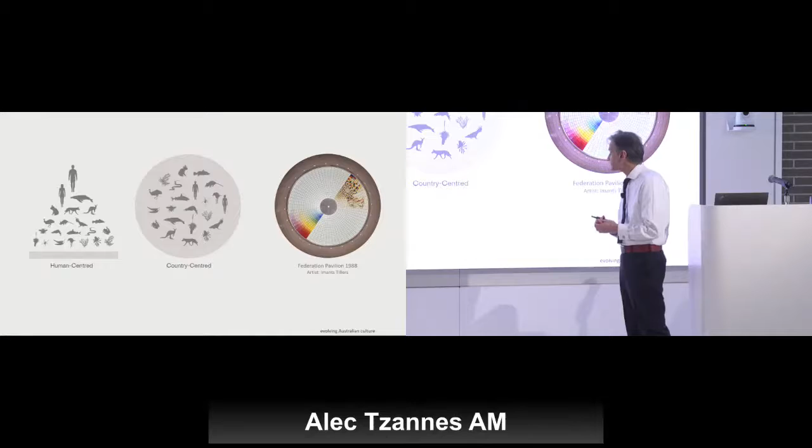This idea of caring for country is now first and foremost in the minds of design thinkers, design selection processes, and design itself, meaning that when we're bidding for work, for government and corporate work, not so much small work, we have to address this change of thinking. And I see this as a very strong thing.

On the far right is a project that Bob Stern published many years ago, which I'm not going to talk about in detail, but it was prescient in some ways, because in 1985, I was selected to design a monument to the Federation of Australia, a country formed in 1901 by a British Act of Parliament. The monument is about the evolution of Australia and also about time, past, present, and future. Inside this dome of 1,800 enamel tiles, I was responsible for the selection of an artist, the development of a brief, and the implementation of the art, the design of the actual construction of the art. But the artist Imants Tillers came up with this incredibly interesting, prescient notion.

Because the interior space is about the present, it's moving, it's rotating, it has a sloping floor, sloping walls, and the way the sun moves around the circular building accentuates the idea of rotation. Imants created these two propellers, and on one side, on the right, you can see symbols from pre-colonial history, from Aboriginal communities, symbols of place and the caring for place, reflecting their values of caring for country.

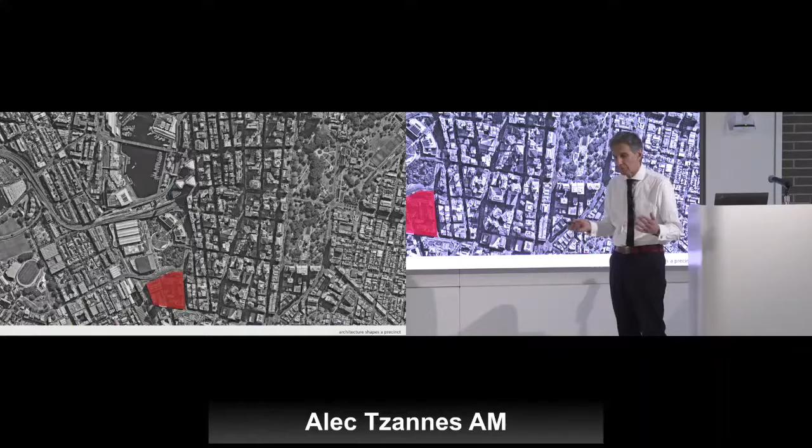It's located in an important part of Sydney, south of the CBD and the edge of the harbour. It is a whole new precinct that came from the disused building infrastructure of not much historic value, and created a whole new residential mixed-use precinct.

Now, in thinking about this project, which was about 600 apartments and a range of scales and also some other uses, mostly retail uses, the things that impressed me in the precinct were the brick buildings. These were the adapted warehouses from the 19th century that were now commercial or residential buildings, or even becoming educational buildings. And what also is in the area and is a very important building is this business school by Frank Gehry in one of the universities.

And I don't take anything away from Gehry's contribution. He's given us so much, including form making, which I'm also a beneficiary of. But the important reason for not using this is the technology, because behind it is a stainless steel 316 steel frame that supports the brickwork, which has, let's say, an 80-year life for a material which has 200+ year life. And that, to me, is unsustainable technology. But these buildings go on forever and will go on forever.

The other important reason was these are homes for low to middle income people. And in Sydney, there's a fine tradition of brick apartment buildings. They're low maintenance, they have a sense of permanence, they have a sense of value, enduring value. Associating the material with the history and also the culture of apartment buildings in brick, I thought gave these buildings a certain dignity, a certain appeal.

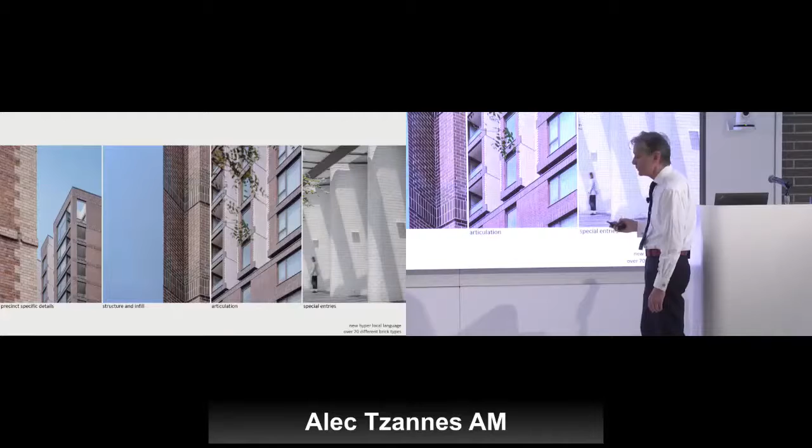So in that sort of sense of hyper-local, the history gave us ideas - and when I say us, it was 3 directors involved, Ben Green, Chi Melhem and myself - ideas on how we can create and reinterpret the language of the past into the contemporary era, contemporary design. Using new glazes, new finishes, and new brick shapes, which Brickworks really developed with us and were very effective in that process, creating articulation and special moments in the buildings with glazes.

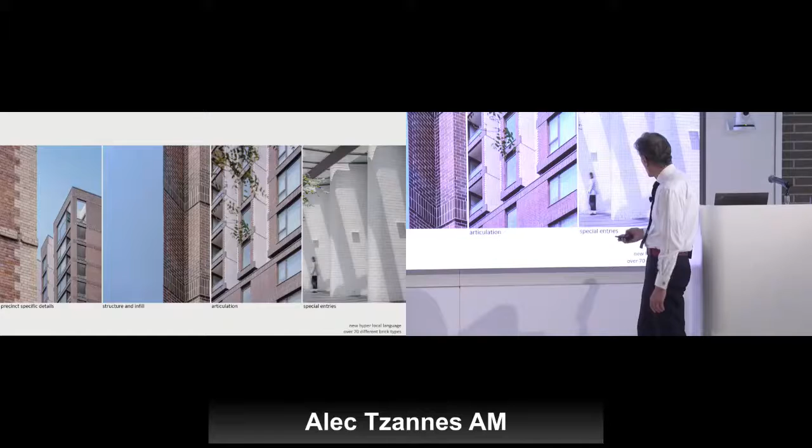All of this, more than 70 types of bricks, came in at the same price point of panelised buildings that were the new buildings in the immediate precinct, the immediate context. And yet those panelised buildings, metal, sometimes ceramics, like the Gehry building, have a use-by date. I've had to maintain them. 30, 40, 50 years, usually about 30, they need to be replaced, whereas this detailing does not need to be replaced.

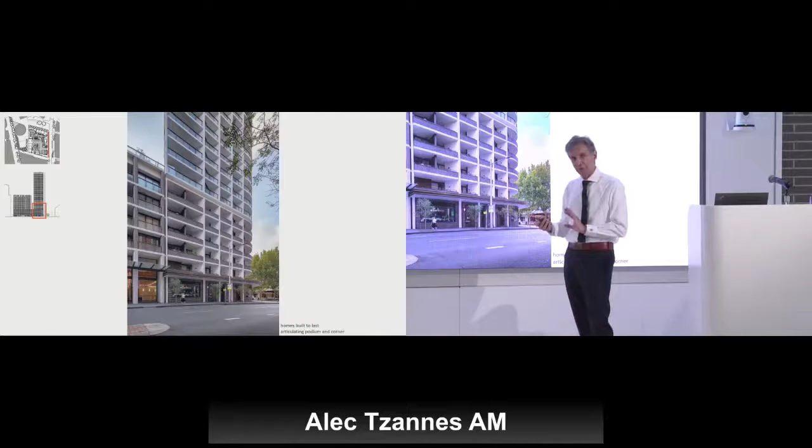So what you see here is that idea of connecting time and place, old and new, breaking the sky, creating this sense of identity across a large project through differentiated buildings. Reinforcing the urban morphology, allowing the building to shape the corners so that you can identify the geometry of the street, the purpose of the streets and blocks, and associate it with the way the building responds to it. So it's in conversation with the context.

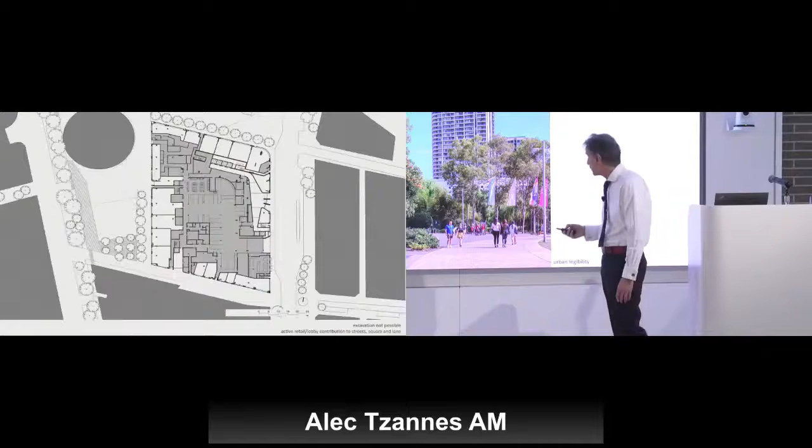And creating landmark or legibility where we have vistas so that you can locate the precinct from, for example, a park to the north. Importantly, this site is below ground silt, and too expensive to build down. So one important design characteristic was...

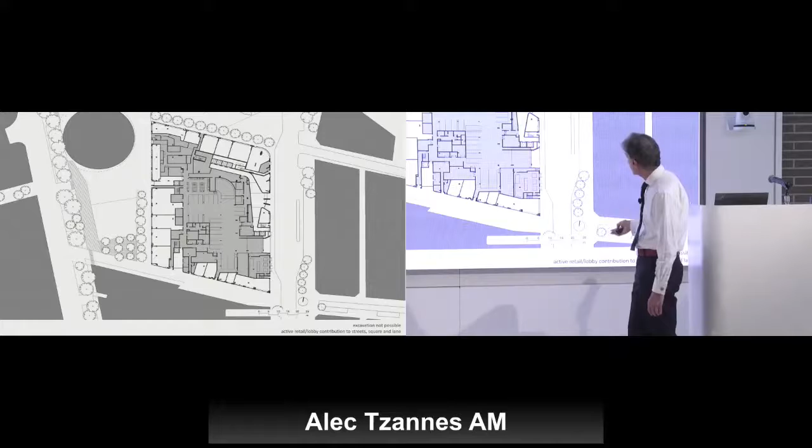...to sleeve the building at the ground level to create entries and retail, to create vitality around the public domain, which is evidenced by this small structure, which is the entry lobby, and the way in which one development is broken up into different languages, a family of languages, four distinct architectures, if you like, making up one complex.

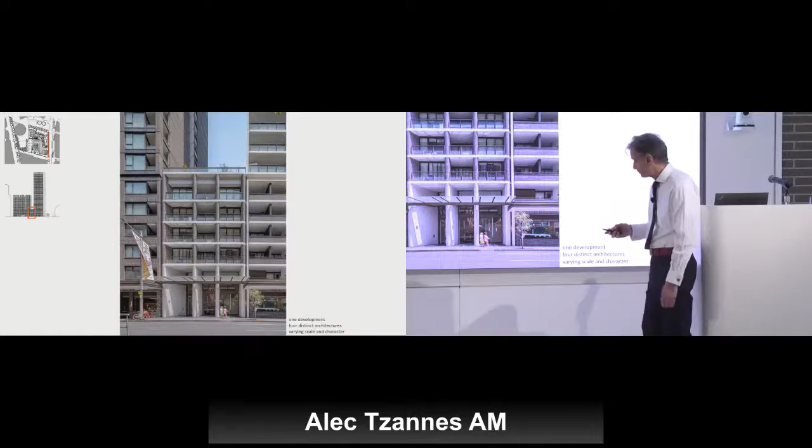And we also followed that for the above-ground car park, where we sleeved it in the podium with apartments, but also where we had a new lane, we disguised the car park with this special brickwork to ventilate the structure, which is shown in these deep reveals, and of course creates a vibrant lane from a blighted precinct. And always looking for opportunities to celebrate the junction of the building with the sky and with the ground. And here you see the sleeved car park.

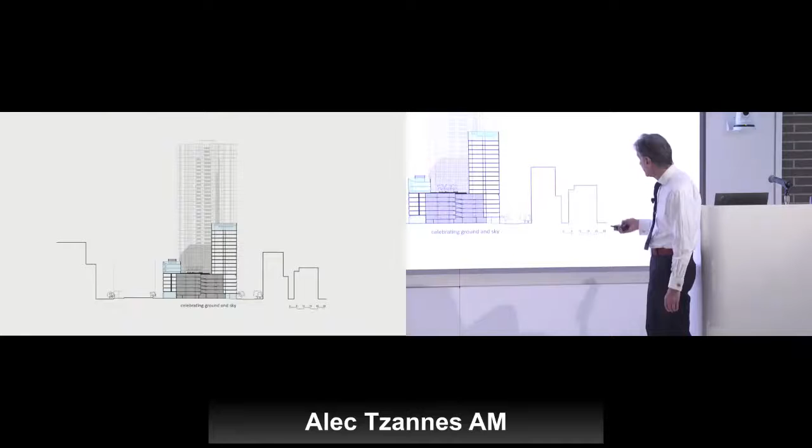And at the podium, which is forming the bulk of the building line all the way around the site, we created a landscape which is reflective of the urban conditions, so that we have this large vista to the open space to the south and to the north. And also we look onto the most important historic building.

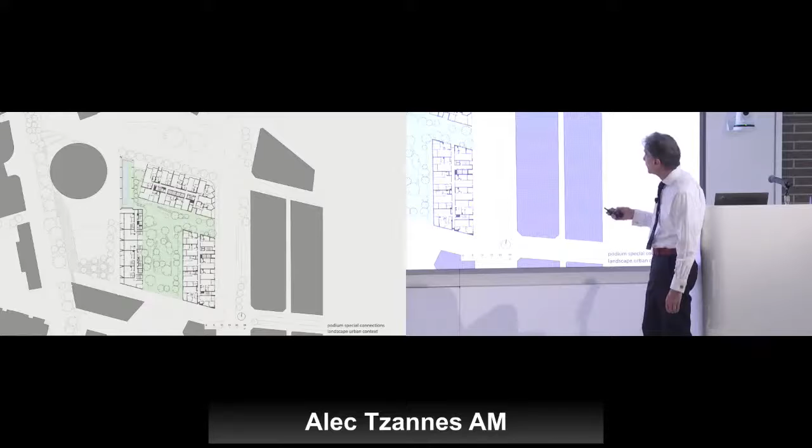You'll also see here a community centre which comes up in the slides, just to the right, where these buildings frame this courtyard. And these are the sky homes that allow differentiated language, create vitality, and work well with the brick language. Here we see the entries always articulated in a glazed brick.

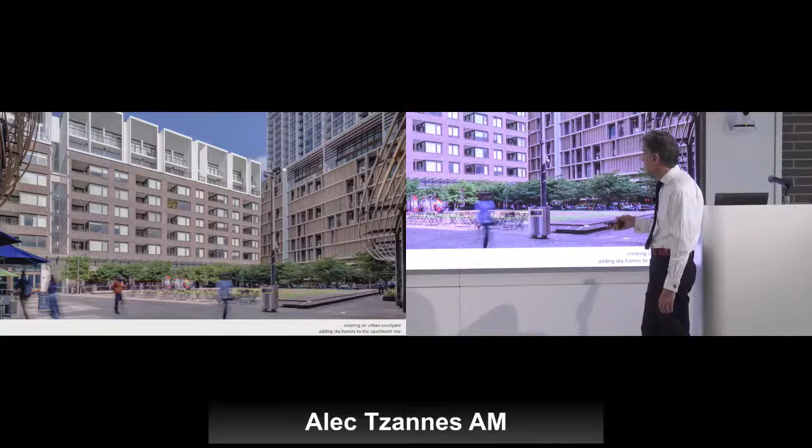And the community centre is the right move from an urban point of view, framing the open space. But I have to say it's greenwash. It's a misuse of timber that won't survive with time, wrapping a completely conventional concrete building. So this is applique, it's not effective from an environmental point of view.

So if that's brickwork, I'd like to move to a very important material, timber, which is probably the only naturally regenerative material on the planet that I can think of.

Two projects, they're, if you like, cousins, and International House Sydney was the first of these. It was innovative, it delivered a lower carbon building by a substantial margin, and was transformative in the design and construction industry by the way it used BIM, Building Information Modelling, and prefabrication. So it's essentially almost industrial design.

We say from the file to the factory, and on site there's virtually no attendance, it's all assembled. And it's also able to be disassembled. This is a critical thing for the circular economy. I think this site is underutilised, that within 20 or 30 years it could be rebuilt, and you can literally disassemble and reuse all this building, even put it on top of another bigger building.

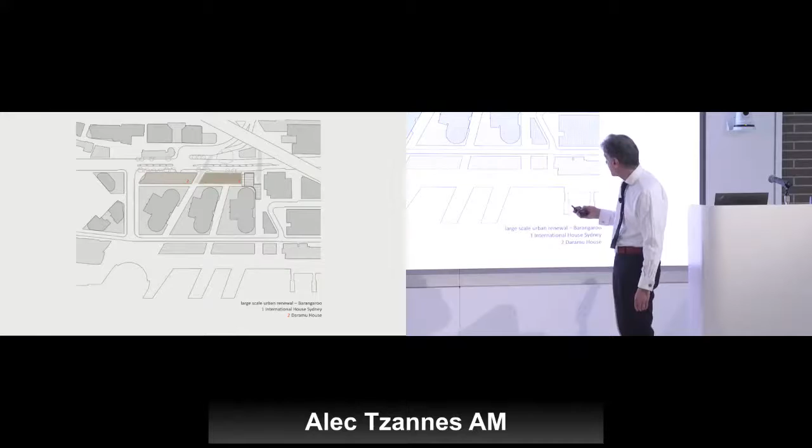In the area are these magnificent trees, decades old, 40, 50, 60 years old. And there's this building which is made from a tree. The spruce pine from Austrian forests is on display. The whole construction is on display, like a kind of warehouse, and it's protected by low iron glass, so it is reasonably clear glass.

Here there is no sunscreen devices because there's no heat load. But we also show the circular economy because ironbark, which is an indestructible timber, I back it in fire against concrete, against steel, against other materials. It is very strong material.

It was recycled from engineering structures and also turpentines from wharf structures. In fact, these are the wharfs from which the turpentines came, and the ironbark came from a bridge north of Sydney. That's an important part of the story, if we're talking about the circular economy, is to use elements from previous buildings, such as evidenced here.

The other thing that's interesting is that Australia didn't do this, but they could have. Austria invested in their forests. They made sure that the stewardship of the forest was such that the soil was maintained, effectively cared for to maintain it in time. And even the trees are felled to allow animals to not lose their habitat. The way of felling them allows the animals to move from one tree to another.

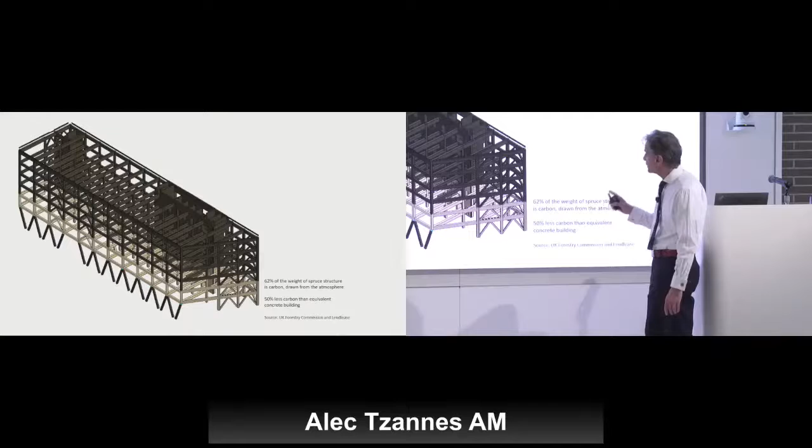But to give you an idea, 6 hectares, which is about 15 acres of a pine forest, can grow the material of this building in 2.5 hours and sequester carbon on the way through. This is the diagram that represents that. So 62% of this structure is carbon taken from the atmosphere.

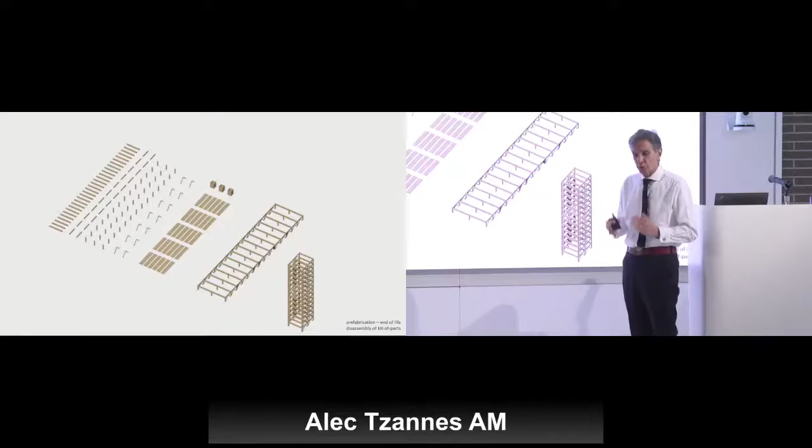And the important point was this kit of parts, that we could actually make this effectively like Lego in Austria, put it on a ship, and then in the order it would be assembled from a truck, crane it and bolt it together very quickly. And the carbon miles from Austria by ship were lower than carbon miles from nascent industries in Australia because of the distances in the trucks, plus the industry wasn't capable of delivering this size building at this time. It's getting there.

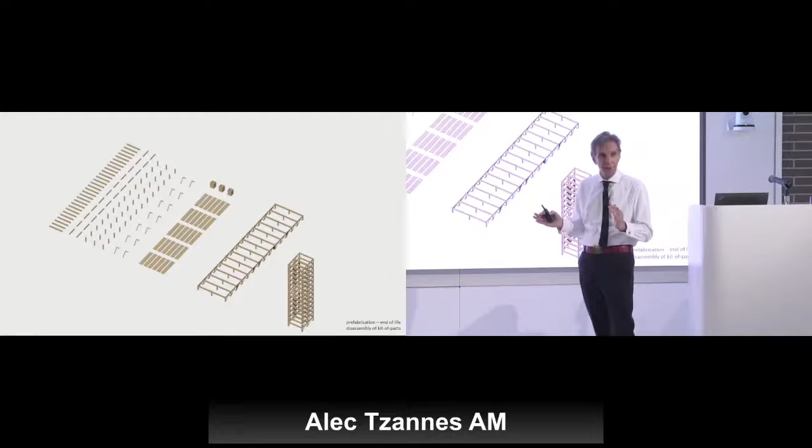And so the timber is the interior. We use LVL to strengthen glulam beams. We have CLT, cross-laminated timber. We have obviously the recycled timbers. And it's more than just timber. We use the harbour for heat exchange to service these chilled beams, and we expose all the surfaces to create the ceiling of timber and to increase height.

And this is around the idea of biophilic design, because we know from evidence that human beings respond well to nature. Even in here, the sense of smell in this building is very light pine forest aroma, and the texture and the warmth of it is a stark contrast to the plasterboard and concrete buildings across the lanes. It seems like it's the past but also the future where we are. It seems like a better place to be and does enhance well-being, productivity, and reduces absenteeism.

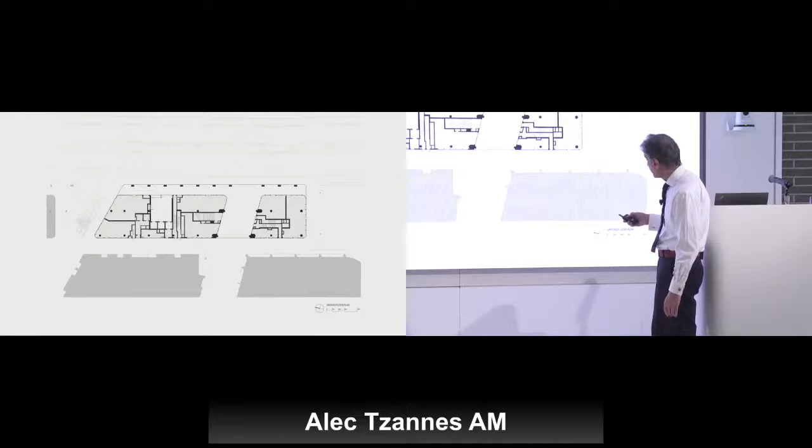And just the idea that it's not about energy, it's not about carbon. The building's architecture is about making a part of the city by this monumental arcade, reinforcing a link to a pedestrian access to the harbour, creating active uses on the ground plane. And of course, it's a commercial building. It's about how effective it is.

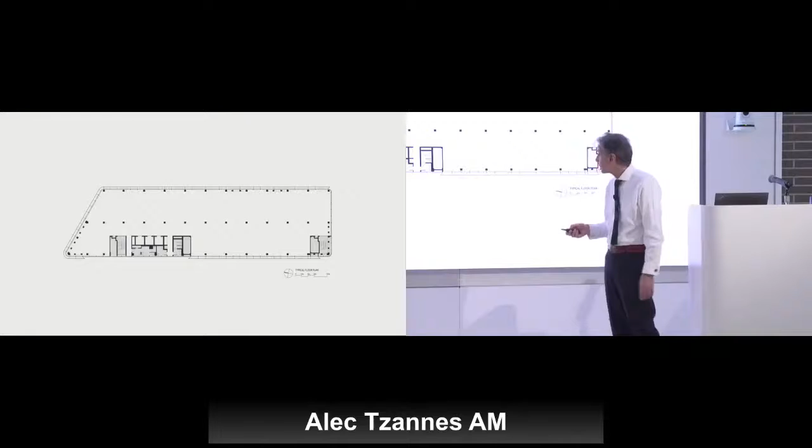This is a 9x6, which is approximately 30 foot by 20 foot timber grid, and difficult to do with timber because with residential you've got minimal cross walls. And of course, all the stairs, the wet areas, the lifts are all timber. The whole thing is timber. You can see how we had to fabricate the timber beams for penetrations, and we designed it both for today and with redundancy for tomorrow to ensure adaptability.

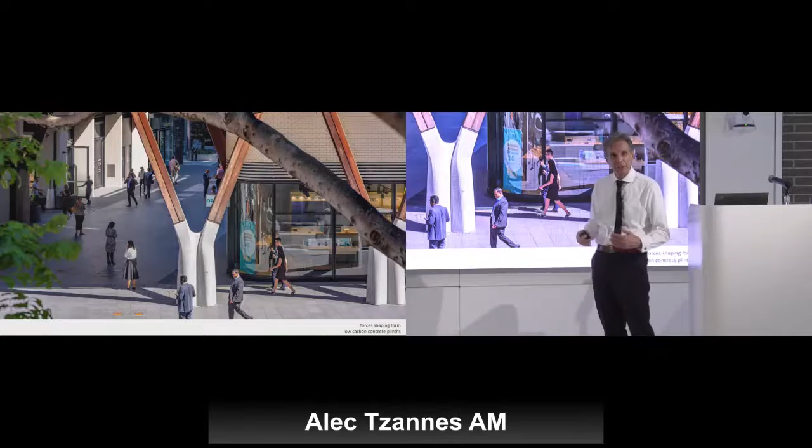The timber is off the ground. Timber's not good hitting the ground. And where the forces that come from the column system and the beams come to this Y-shaped column, we shape a low carbon concrete to reflect those forces and transfer the load to the piers below ground. So it has this sort of expressive quality. And you can see everywhere this idea of the tree structure from a tree in nature, and how the space is made to the harbour for pedestrian access, and how the contrast of this warm experience against the backdrop of the commercial buildings around it.

Daramu House allowed us to advance our thinking, refine that knowledge. We had to complete the colonnade in a way that made urban sense, but also was distinctive, so you could find yourself, know where the two different buildings were. The addresses were distinctive. We were able to, because the first building, even though it was not pre-leased or sold, eventually leased very, very well. The developer said they could lease it 5 times over, so the budget was loosened, and we were able to make more enriching timber expression. We were able to learn from our experience and improve the environmental performance, and we confirmed that this is a commercially viable product for the commercial market, because it was not viable before this work started.

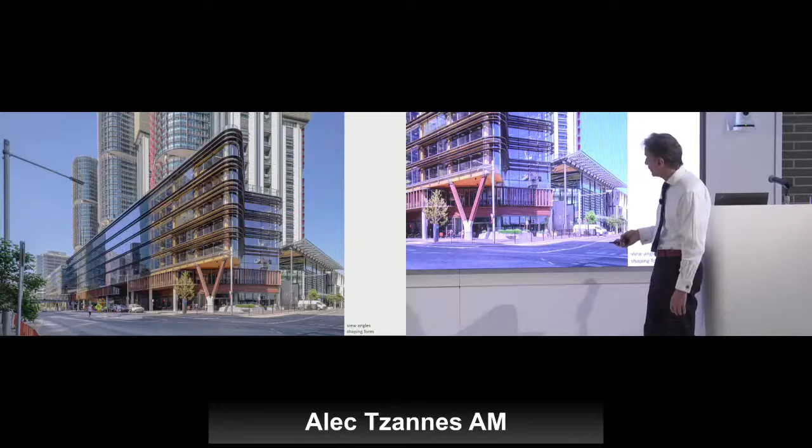So we lowered it and we were able to use timber in a more expressive form. We still kept the Y columns to connect the two colonnades, and we made these special places at each end, which you can see here at the north, also at the south, and we're able to make, for the first time, a foyer that connects the main street to a pedestrian lane.

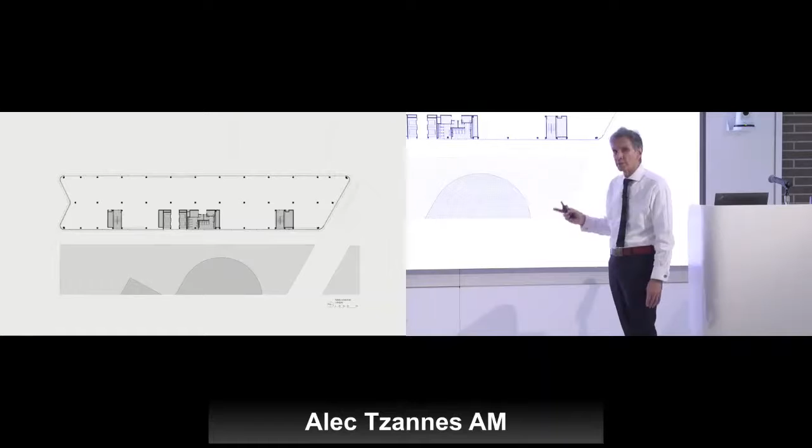And this is the commercial plate, a bit bigger this time, about 30% bigger and built for the same price, which is learning from that technology.

And it shows you how timber enriches experience, because this two-story foyer now uses recycled timbers. Always the CLT, the spruce, when exposed, is protected, and the very durable timbers are not.

And it becomes this essay in form and shape and materiality. It has this tactile quality and this aroma and this visual sensation, which is different to other materials.

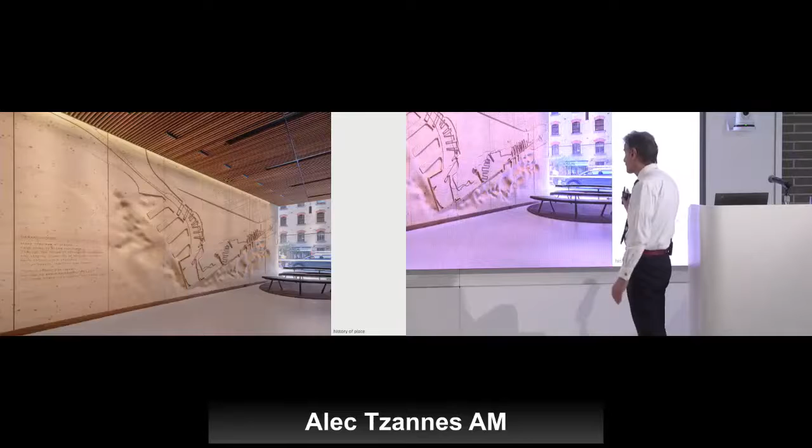And we even made a work of art using the same CNC technology that made the building, to show the passage of time from pre-colonial waterfront to the present.

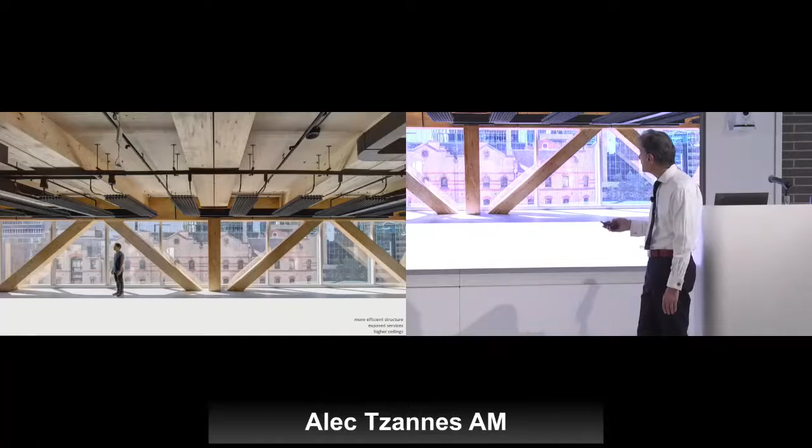Inside, this is an example of strengthening the glue lam with LVL, laminated veneer lumber, and we used a 9x9 grid, which was more structurally efficient.

An example of the fire stair, where we used the softer timbers for wall linings and Australian hardwoods for the treads and risers. And both buildings have got photovoltaics and accessible roofs, but the first building, we couldn't afford the landscape. The second building, we could.

Very similar location, very similar shape, very similar array of PVs. With the landscape, the efficiency rose by 5 to 25% depending on the season, by independent university research. That's largely because the photovoltaics are less efficient when it gets very hot, and the landscape lowers urban heat island effects. So we're able to prove a theoretical piece of research with this project.

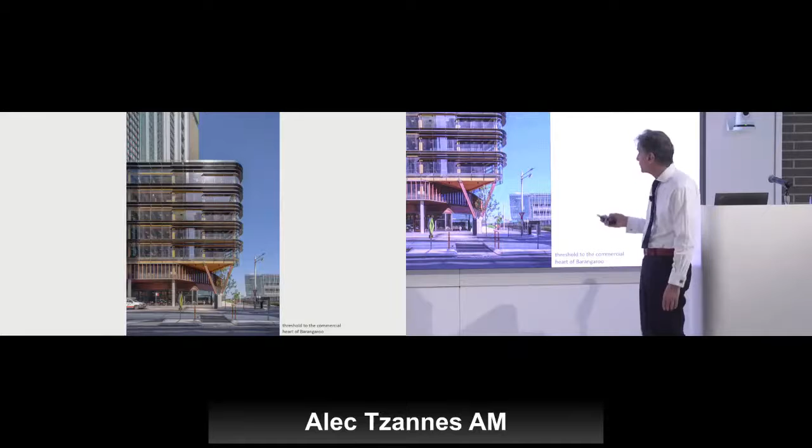And again, terminating the building, this inviting building, a warm building compared to its neighbourhood. And also, where we need them, we have these louvers to allow us to use the low iron glass, to not block views but to shade the building.

I'm going to move to industrial design and a really interesting project. It's about urban furniture. And the idea was that the furniture that Sydney had was to change. The City of Sydney decided to change the furniture.

It was a design competition and selection process. Our proposition was around the idea that furniture could help define unique identity, much like songs can define cities like New York, like Paris, like other places. And the question is whether this furniture does that, and what that might be.

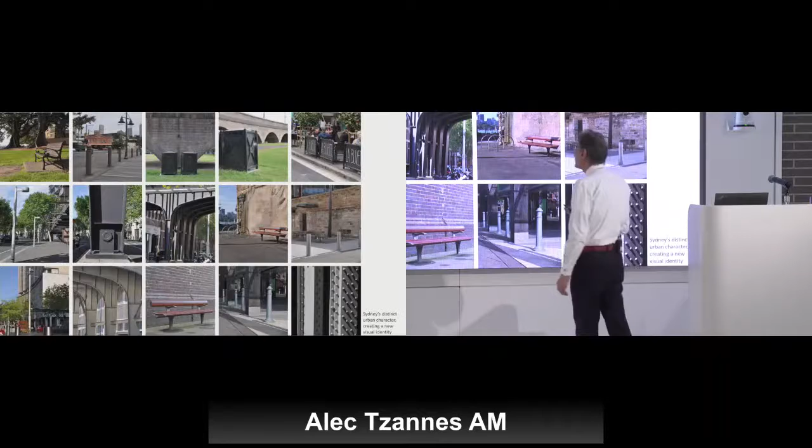To embark on that idea, we first looked at what was the environment that we inherited. There are two characteristics I will focus on. The first is the use—this is the current furniture, derived from essentially English culture, which is the predominant colonial culture. These garbage bins, these benches, these bollards show that.

The other idea is this industrial heritage, particularly the very direct detailing from plate steel, the robustness, the simplicity of this harbour city's historic architecture.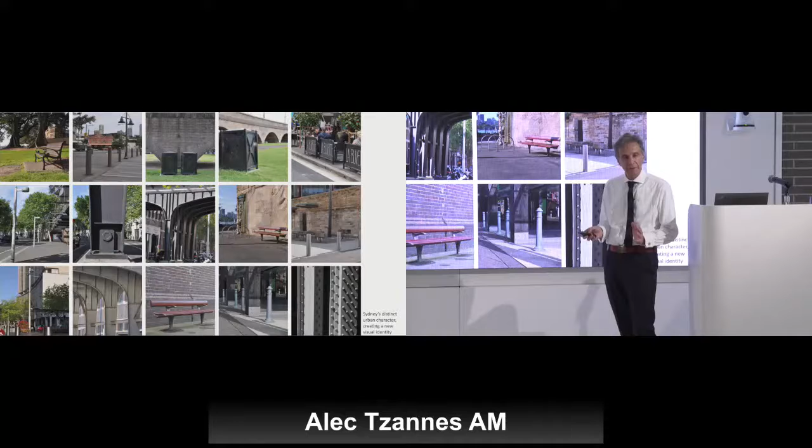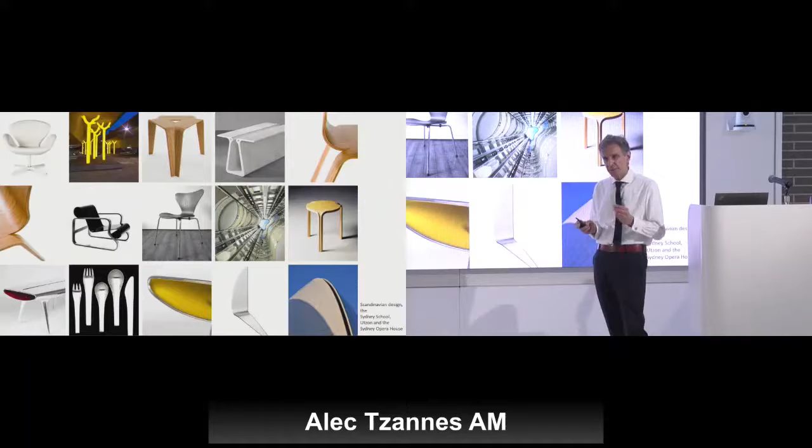And we also had the Opera House from 1957, quintessentially Utzon. This is unique in Australia. We even developed a type of architecture called the Sydney School. A simple way of summarising it is that if the Bauhaus-derived architecture was, let's call it, white architecture, the Sydney School was brown architecture. It was about bricks, about timbers, these integral materials. It was about flowing forms, simplicity and longevity.

From these ideas, we created this family of forms, bollards with and without lights. We now have a new one, which is much more elegant, I might say, than your New York ones, which are kind of truck-proof.

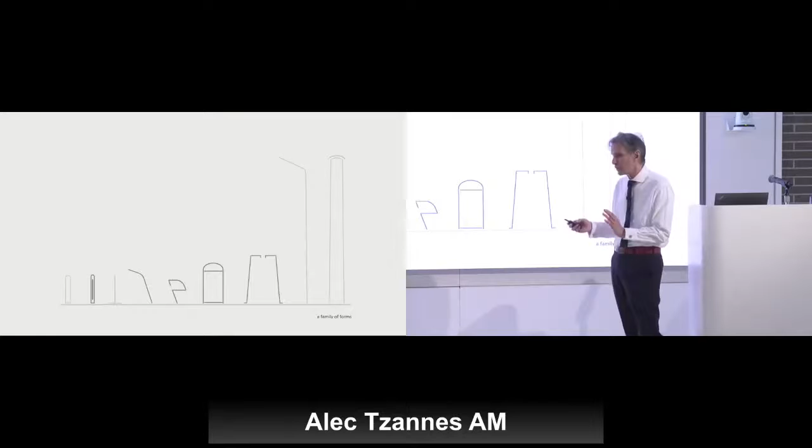The water fountains, the benches, the garbage bins, the tree guards, and a few lights reflect this idea of Scandinavia, this idea of what the city is, reflected in this dynamic, casual, flowing, fluid form. Sydney is youthful, it's dynamic, it's a busy place, it has a climate which is very attracted to outdoor living, and it has this Scandinavian heritage.

You can see it in ways here, the tree guard, and also the water fountain. The water comes there and then it flows back to the drain. And we also have another one, which is a small bowl for dogs. And the garbage bin and the tree guards.

The idea is that in different contexts, the industrial, severe, contemporary architecture, sometimes industrial architecture, or the more soft, organic, natural structures of the built environment carry the idea of movement, these flowing forms, they're not static. The structure is not clear, it moves in a flowing way to its support.

What I really like is that the City of Sydney conducted an anonymous survey, universally distributed, with a huge take-up, and it was overwhelmingly liked, which is very difficult to do. You can see here how the community ignores it, that the tree guard is for bikes and it's just part of the furniture, if I could say.

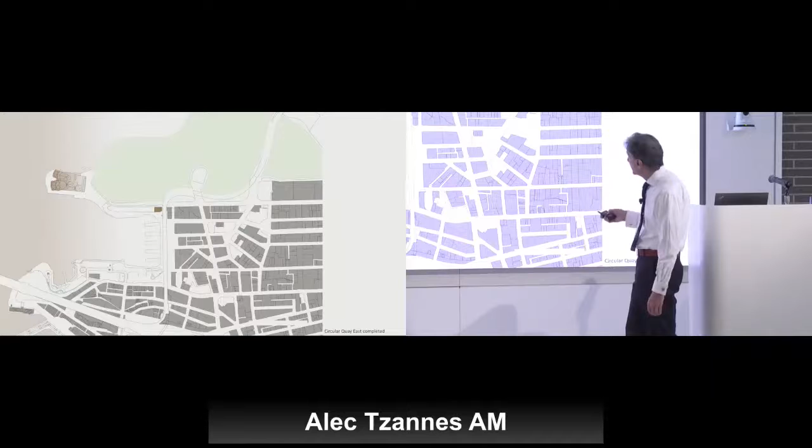We have others, including some important heritage, Fort Denison, for example. This project is at the start or end of this promenade to the Opera House in the city, and Australia's busiest transport interchange, where we have the Botanic Gardens on one side and our most important street in terms of residential and parliamentary buildings, linking to our port, our front door.

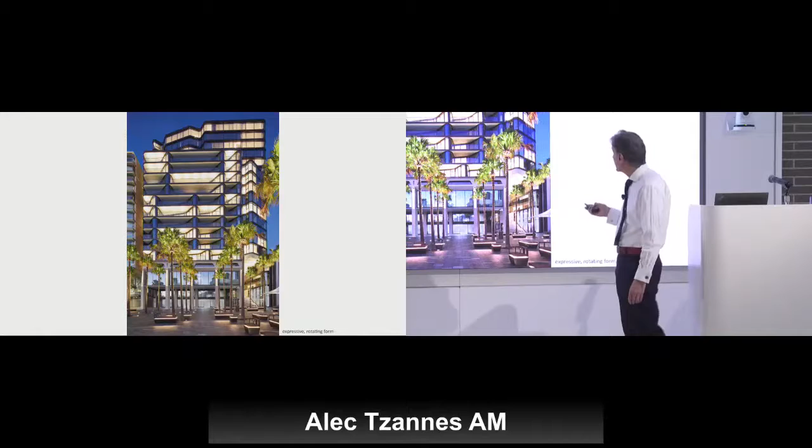And this is the building. You can see the end of the colonnade to a monumental stair, but mostly it's in a busy place, and this side of it is quite expressive, rotating, moving, dynamic. These are bay windows that form the apartment divisions, opaque on one side but clear on the other, and they're tilted towards the views, and they divide the apartments in glass.

It was double and triple glass, so technologically it's a world first because we made it and are able to not have it distort. And also, I don't know how many buildings use this bay window to divide apartments.

The main level plans, there's two levels, connect the colonnade to this grand stair that connects you to the Botanic Gardens and Macquarie Street from Circular Quay. And on the other side of the stair, we have active uses.

Above, in the lower floors, where we have smaller apartments, you can see how they're shaped to take the views of the Opera House, also the views out, where you can stand in the view, as I mentioned, or across to the Harbour Bridge, or rotating back to see the city.

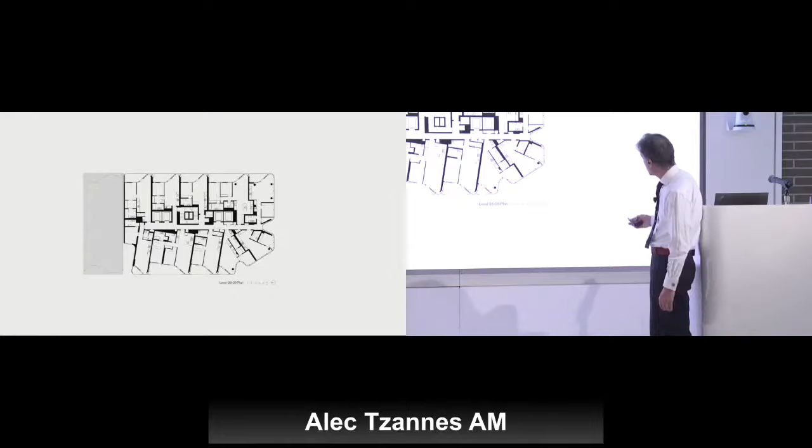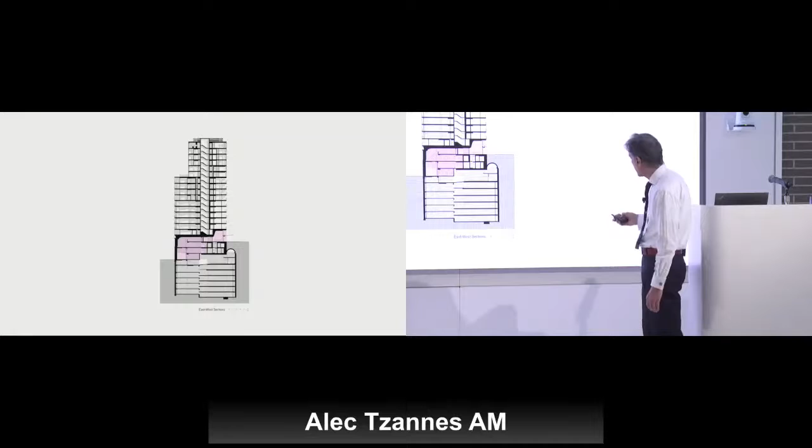This is a section showing the scale of this grand stair and a structural soffit to express it with the different levels of accessible public interface, with the apartments starting above.

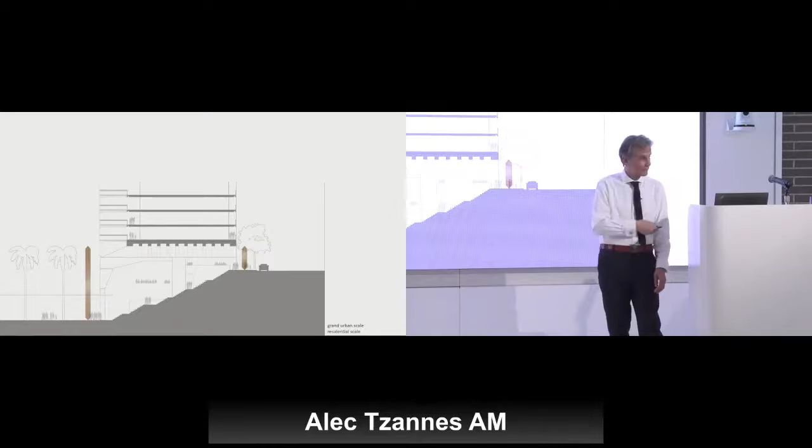One of the things that Sydney has developed is this idea of a structural soffit being expressed, but it was first done by Utzon in the Opera House. Not many people who haven't been there will realise that you have the grand stairs to go up, but you can also enter by vehicle or by foot, and you'll come and look up to these massive T-beams that are exposed and form the architecture of the building.

In this way, although it's very modest by comparison, we have the transfer structures reflected in the forces, shaped to reflect the forces, connecting you back to the Opera House in some kind of way. So you start or end your journey with this idea resonating.

This is this other idea of stone, concrete, and glass in a seamless transition, tilted to the view in a rhomboid shape, becoming finer and, if you like, liquid in expression. Glass is a liquid, and so is concrete, and the idea of making this continuous transformation of form through material.

Here you see the connection of the colonnade with the more typical neoclassical, modern, if you like, elements becoming this element, but still aligning exactly, and the start of the stair.

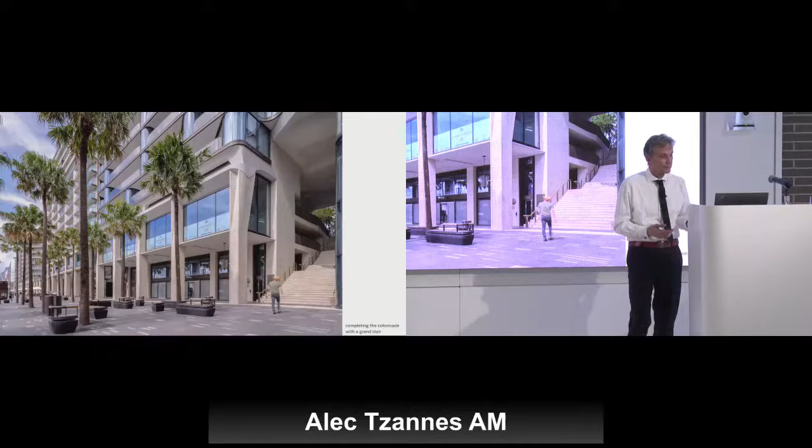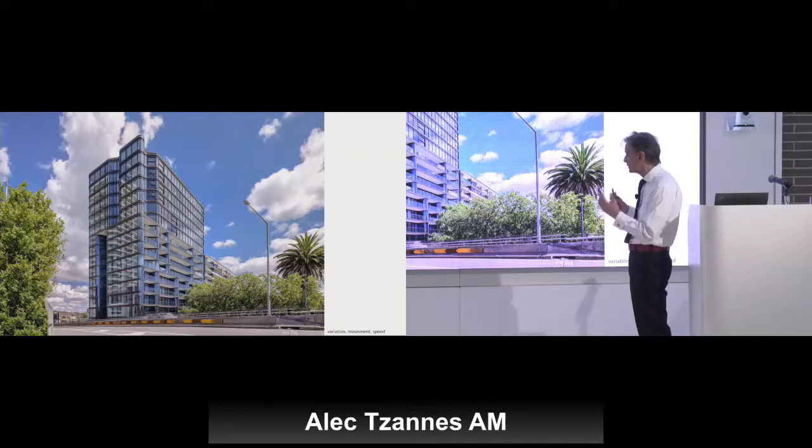The idea of movement and rotation in a speeding vehicle particularly is enhanced by the architecture. You feel, as you look at it when you're driving, that the building's driving with you, so to speak. So it has this variety that changes with the immediate context.

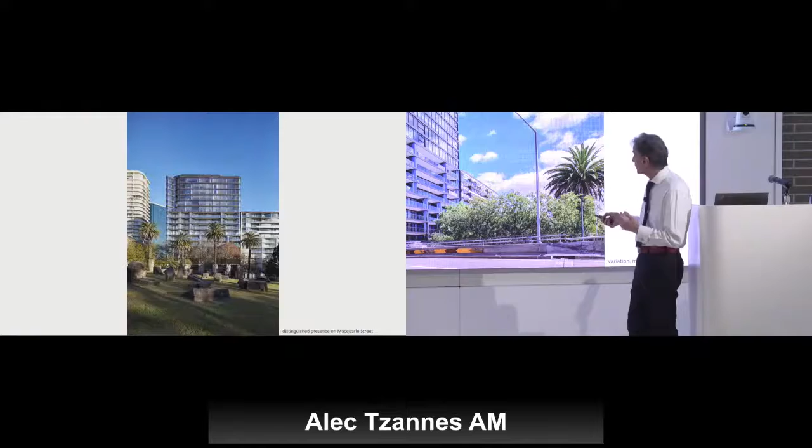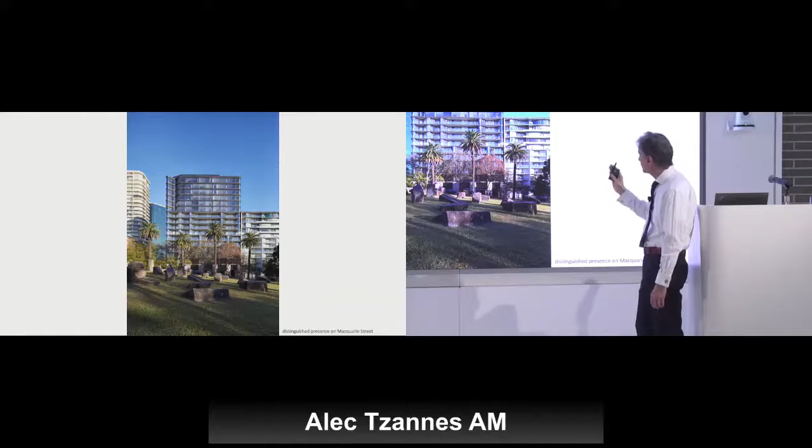On the dignified side, on Macquarie Street, where the residential address is, it becomes much calmer, more gravitas, more similar to the buildings adjacent, by comparison to this energetic Circular Quay side. You can see how it completes this significant residential precinct and how it overlooks the Opera House and the gardens.

I'm nearly there, there's two more projects. The Dangrove Art Storage Facility, with Chi Melhem as co-director, she was responsible for the delivery of our documents in about 8 weeks. She led the documentation team at 90% complete, very fast. Thank you. A very fast factory, a factory to art.

Our client, Judith Neilson, is very forward-thinking, very design-sensitive. She conceived - when we went to look at storage facilities, she rang me and said something like, if you design one of those for me, you've lost the job. She hated them. And she added to her brief the idea that the storage facility could be something more.

It could be her place of curation for the White Rabbit Gallery, which she's gifted to the nation, really, which displays her art. It could be a place for conservation, administration of the collection. The collection goes everywhere - it's even here in New York, I think at the Met.

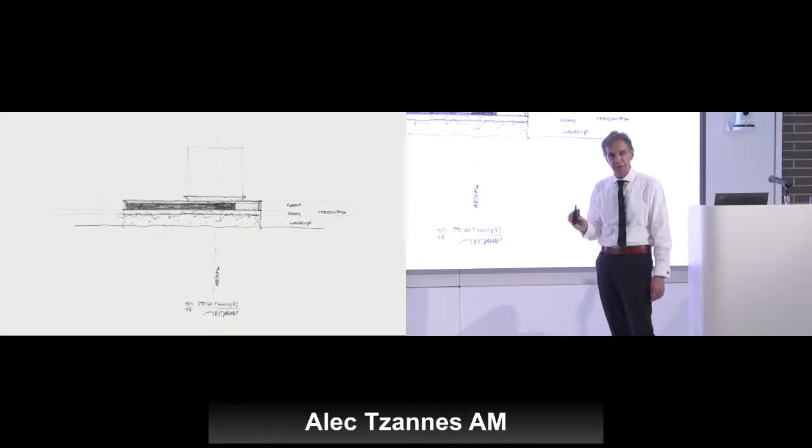Although it's a factory, it had a poetic dimension, expressed for me in the vertical dimension. In the plan, in the horizontal dimension, it simply had to work - built to budget, built to speed, and had to house an awful lot of art. It is, I think I said, the largest collection of contemporary Chinese art in the world.

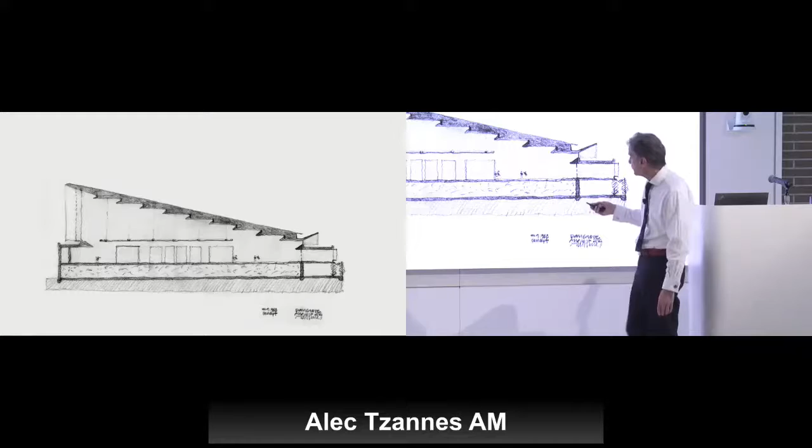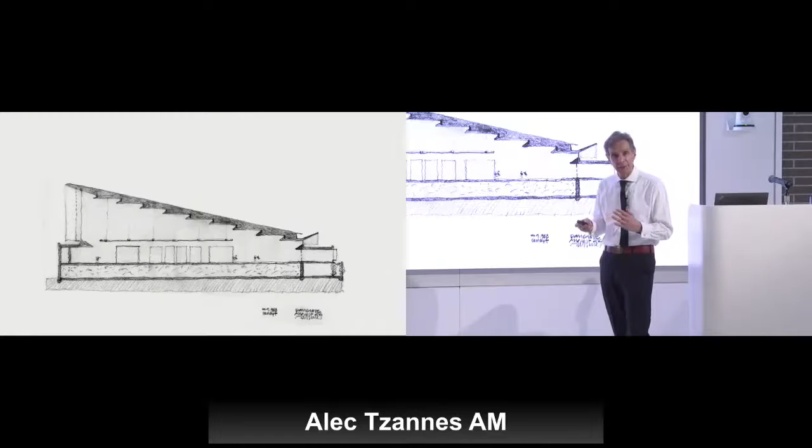So this is the vertical dimension, where around the storage is this room that's approximately 90 meters, close to 300 foot, by 18 meters, or say 60 foot. Above a certain height, it's all polycarbonate, a beautiful light. It has natural light at either end, and is a creative place, a place of well-being for the people who work there - they can come out of the storage, assemble and examine the work in this space.

And it leads to an ante-room, if you like, which is here to the views and to the sun. This is the fundamental plan idea: when you come up to the main space, you have an assembly, pre-function space, and then you come into what we call the Great Hall. You move from the Great Hall to the storage areas, which are part of the display, which you can enjoy - you can go down into the lower levels as part of the display.

And the lowest level is the most rudimentary, the most functional, from large container services that lead to a very large lift, but also designed for a forklift truck, the large ones, to do a 360-degree turn easily, to these storage places, to these workshops, and to back-of-house low-energy technologies.

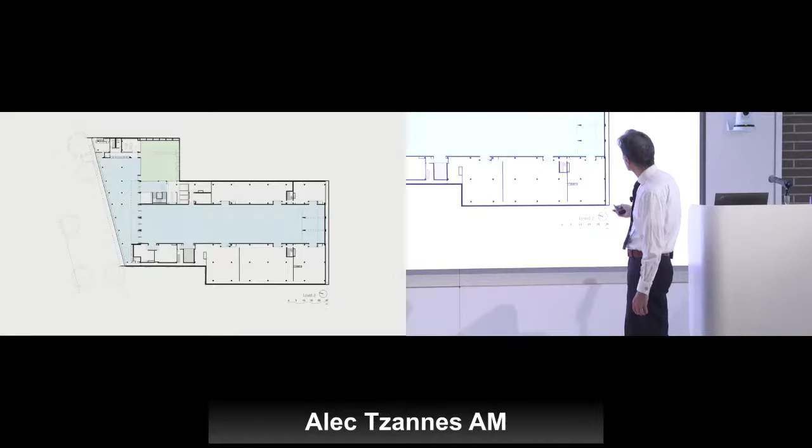Or you come through the car park to a secure spot where you enter the building and go up the lift or the stairs to the main part of this storage facility, which is this area. You come up the stair or lift and arrive at a sculpture courtyard, the pre-function space. These doors are often closed in this spectacular room, but you can walk into and enjoy these storage facilities, or go back down and enjoy them.

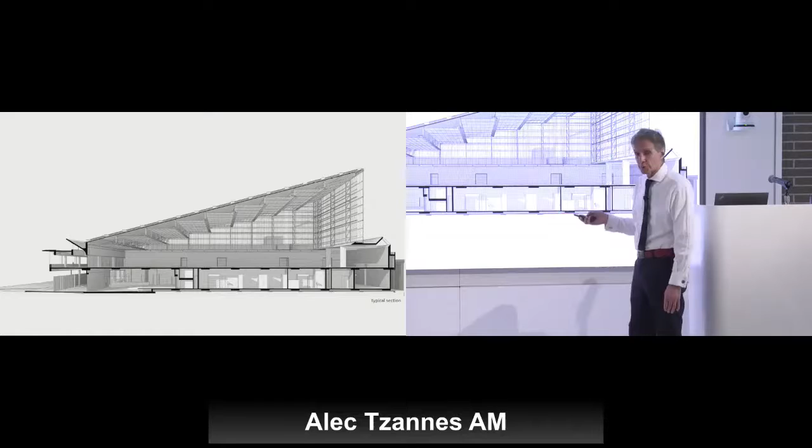And this is the idea in a more developed form, where 535 photovoltaics power this building at 22 degrees centigrade, 50% humidity, 24/7, except for this main space, which allows about a 10% variation because the art's not in there for a long time. But also this is a huge water collector.

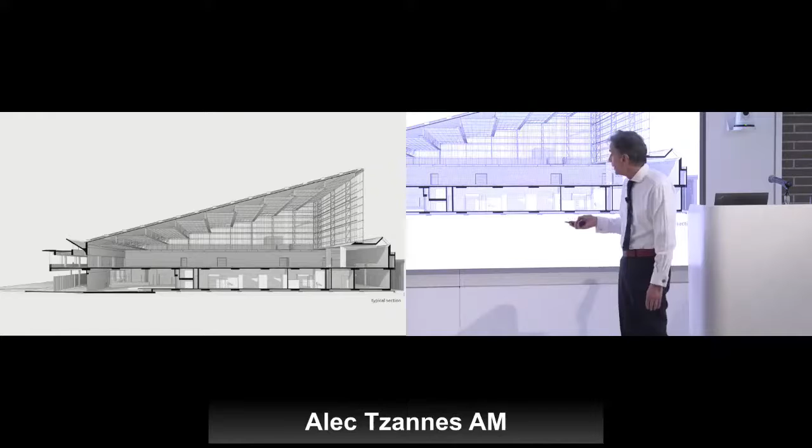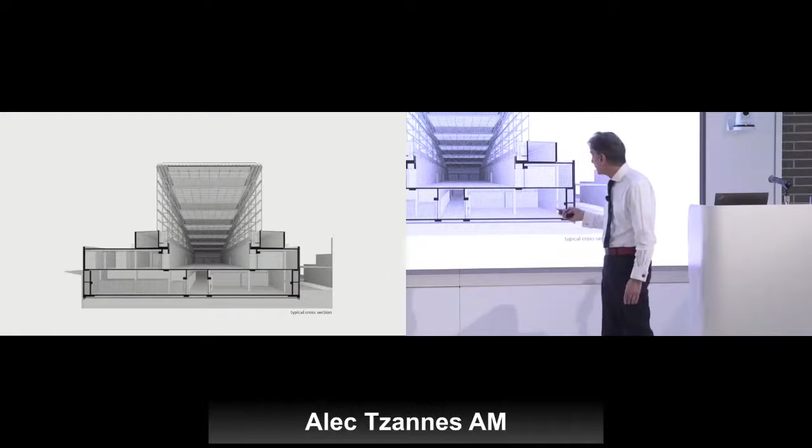And in the other section, this double-skin polycarbonate is the only time where we haven't got a 100-year life; we couldn't build the glass for various technical and cost reasons. But we detailed the polycarbonate in 2 layers so that if one is damaged, you still have waterproofness, and it's all simply detailed to be clipped on and clipped off. But it also produces this remarkable light into this big room.

And I should say all the services are outside the space and delivered through this steel re-entrant. The courtyard, sculpture garden, the main space from the anteroom, the northern skylight, which you can see as you enter through here - and you can see this cool, ethereal light, which also goes with the acoustic.

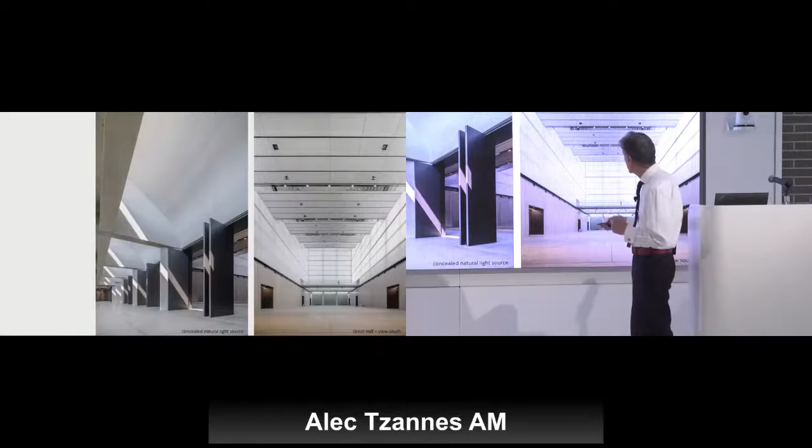It has a long reverb, very good for a lot of music, designed for a lot of music, but not great for fast staccato electric guitar, for example. But it has this cathedral-like quality.

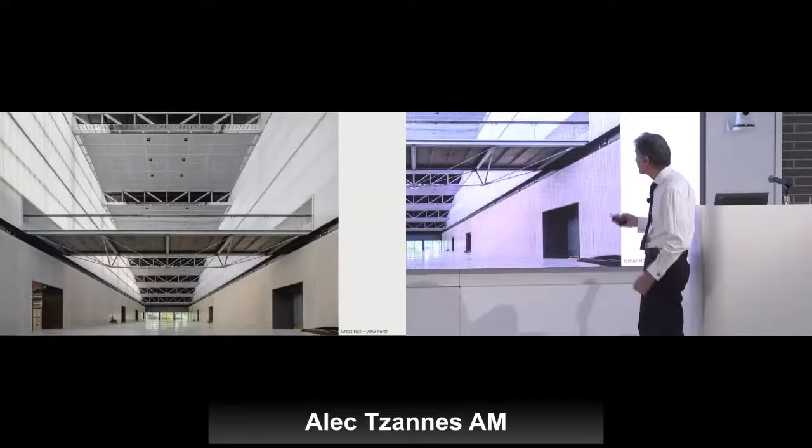And you can see where the services come in, and this is high-quality precast, or very high-quality precast or in-situ floor. The other way, everything's revealed: the structure, the acoustic attenuation, and how we can suspend works of art, massive sculptures.

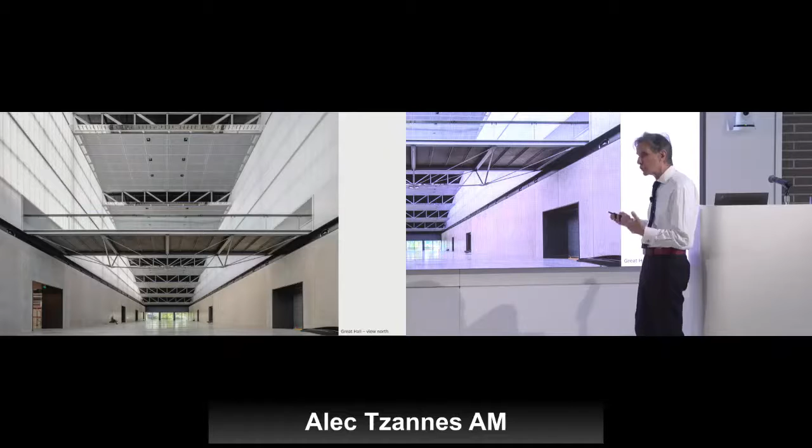The whole room is programmable from light and sound points of view, and you can have a bridge for aerial display, which you can see up to the 30-metre high space, which has a purpose. There are sculptures that are around 20 plus metres high, plus we have aerial sculptures which had to be accommodated.

And in the detailing, we screen the acoustics. We also can suspend things easily, and we feather the edges of these elements to create scale and a sense of the materiality, the reflectiveness of this extraordinary light.

And all of the building has got bespoke steel, blackened steel and bronze furniture. It's not to be changed. It's willed that this building will remain intact with its collection for 30 years after her death.

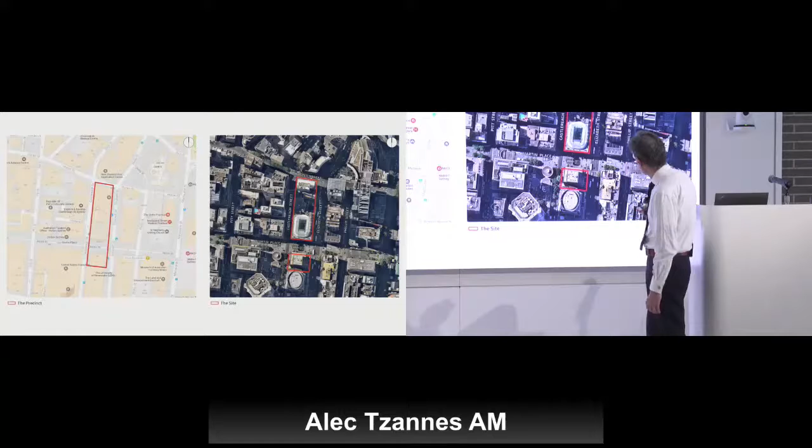So it's a story about a very special place and how to make architecture relate to that place, enhance it. For those who don't know Sydney, Martin Place runs from the Parliament and Hospital area on Macquarie Street right through to our ceremonial centre, the War Memorial. And we did all of this from an urban point of view, but our project is 39 Martin Place, opposite one of Sydney's most important historic bank buildings.

This is one part of Martin Place, which is the symbolic and cultural heart of Sydney. And you can see it in the quality of this colonial architecture in sandstone, the material of the city. And you can also see it is horizontal, it's flat. And that's where we celebrate important events, also where most demonstrations start or finish.

By comparison, the messier end is historically the commercial heart, not so much today - it's been degraded over time. This building was possibly the lowest standard building in the precinct and is to be demolished for the new building, which is under construction, which I'll show you now.

And it's opposite this very important bank, finished in 1924 to 28, which was designed by Ross and Rowe. You know when you come to Martin Place in Sydney because it has a predominance of this standard of building. And unlike New York, it's relatively unusual, so this architecture defines the significance of this street.

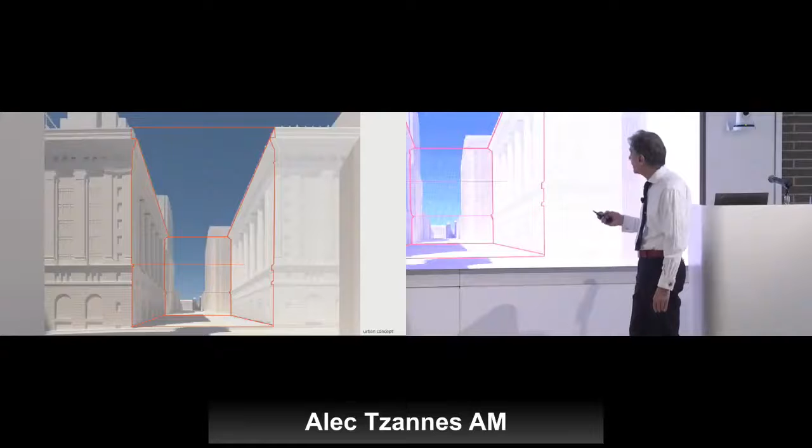Our idea is to create a conversation between this building from the past to the present, a building built in the Depression to a building built during another form of economic hardship, let's say COVID-inspired hardship.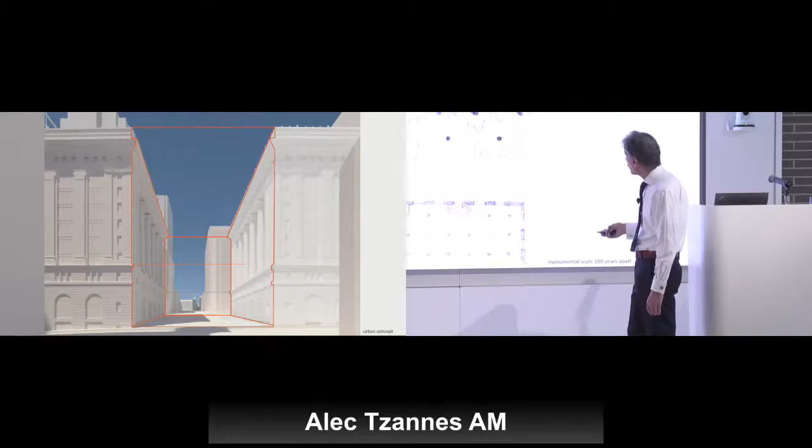It's an interesting exercise in many ways because this is a monumental building about security. In the 1920s, with the Depression, the architecture had to be about safety - put your money in the bank, it was saved. You still have to knock on this door, sound the alarm to get in. It's a magnificent interior, but it's isolated from the outside.

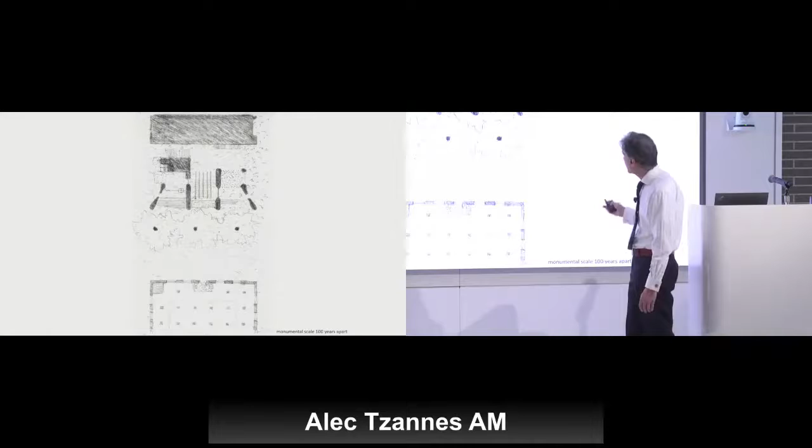How do you make a building conversation where the city, for good reasons, wants to make an active ground plane? The idea was around the monumental structure - we needed to span the railway system below and how we could create views from left to right of this structure, but at orthogonal directions. It had transparency and connectivity and active uses. So it's a story about two forms of monumental architectural expression, which you can see here.

We are reopening the quarry to make the base out of the same stone. We're not using the ceramic tile, but we're using a much larger ceramic unit construction in a similar colour to make the base, and we're aligning all the dimensions as shown in the diagram. But we also carry that ceramic up and across the top and house this glass conservatory-like structure, which is the tower element. And we also worked out, as part of the urban design, that you could build to zero setback

here and not increase any overshadowing. In fact, we are able to improve the overshadowing against the development controls through ways which were not anticipated by the development controls. But the zero setback - they required an 8-metre setback - allows this building with the opposite building to be reflective of the significance of the street. So we have the architecture reinforcing the hierarchy of spaces in the city. South, nobody can build to this line because they overshadow, so this will always remain a significant exception to that rule.

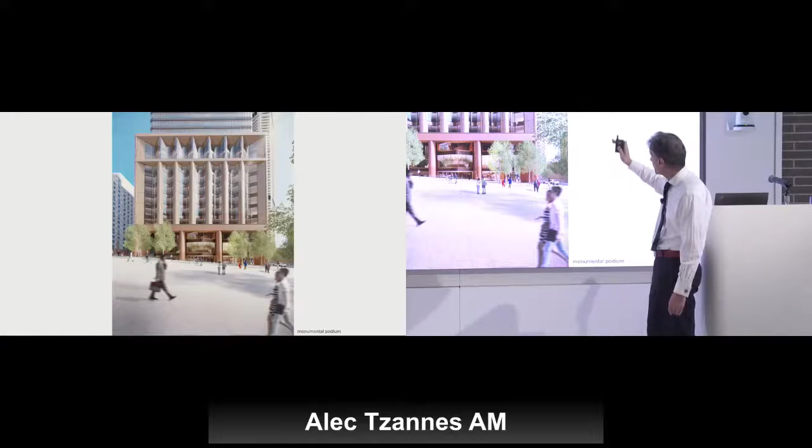And to the principal facade, we carry through the reflection of the Doric columns, the super top floors, which in this case is glass, opposite is mostly solid, and you see the monumental structure, which in built form is used to signify the building from Martin Place, but also to allow connectivity through 3 streets connecting everything on multi-levels at the ground plane to create these active uses.

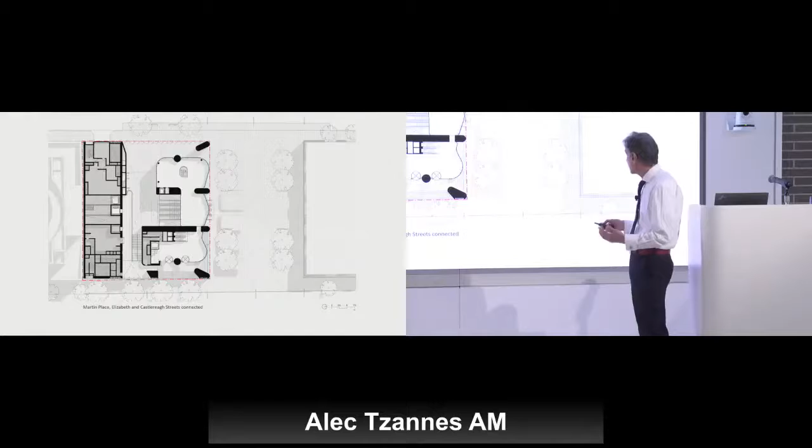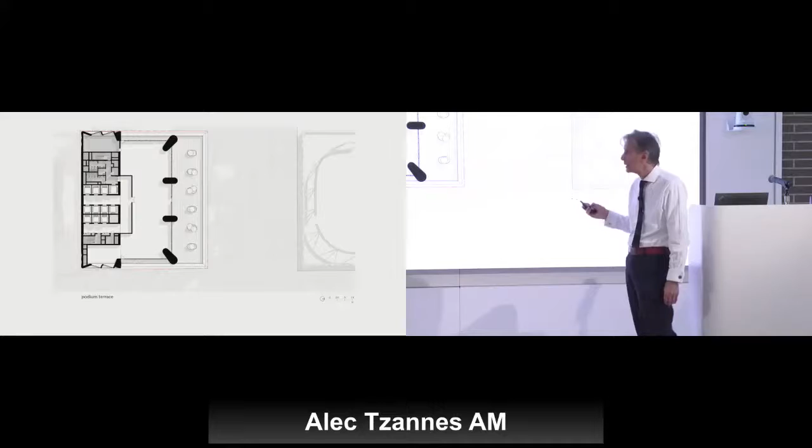There was pressure to put the plant at the top of the podium. Instead, we were able to argue that the value of this as a publicly accessible space was worth the extra cost of putting the plant in a less efficient position. And we've created this terrace which overlooks Martin Place at the podium height, and this is a typical plan.

And the section, you can see how we shape the roof, how we have special double height spaces, and how we transfer the structures through these big walls that carry the load across the railway stations. And again, you can see how it resembles, but isn't the same as, the building opposite. It has the same geometry, but totally different expression.

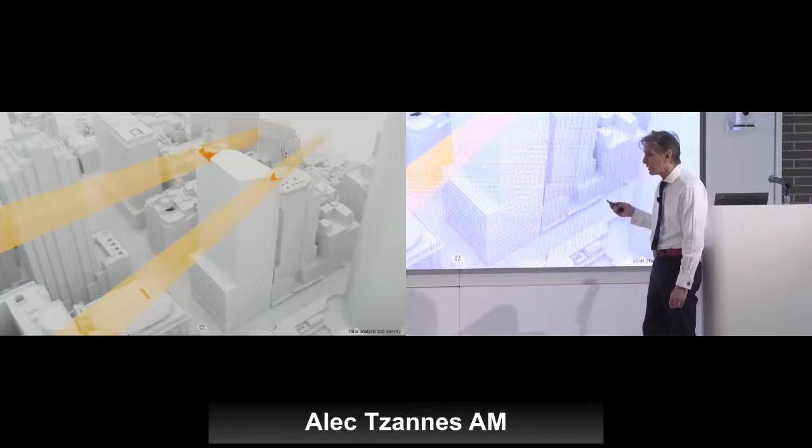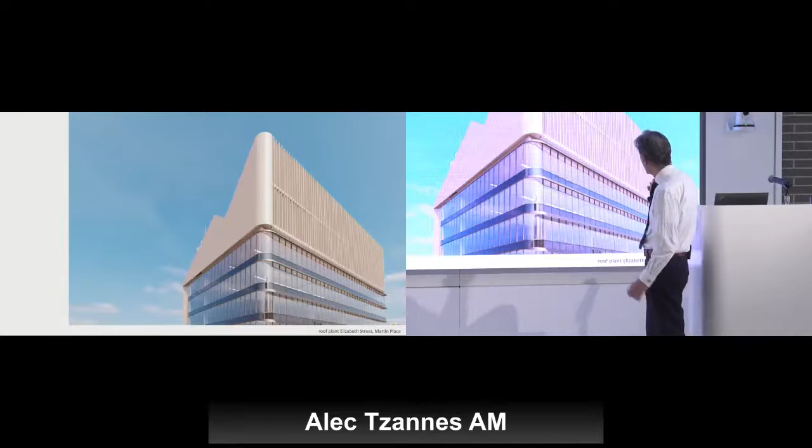Again, on the other side, an example of the modelling we're able to do, which shaped the top to deliver more solar access than the development controls permitted - the development controls indicated through their reference design - by shaping the top to create distinctive form on either side of the building. You don't see the two sides together, and they're differentiated through the solar access plane. And where it's important, the building is symmetrical.

The other thing we did is heal a degraded urban space. This is a great building, but a very poor urban outcome, partly because it was unenclosed. Now we have, through this new development control, a zero setback building which completes this square, and also this lively curvilinear building which creates a context which is more sympathetic to this eccentric circular building. So the two together now are in another conversation, I think, making this building much more valuable as

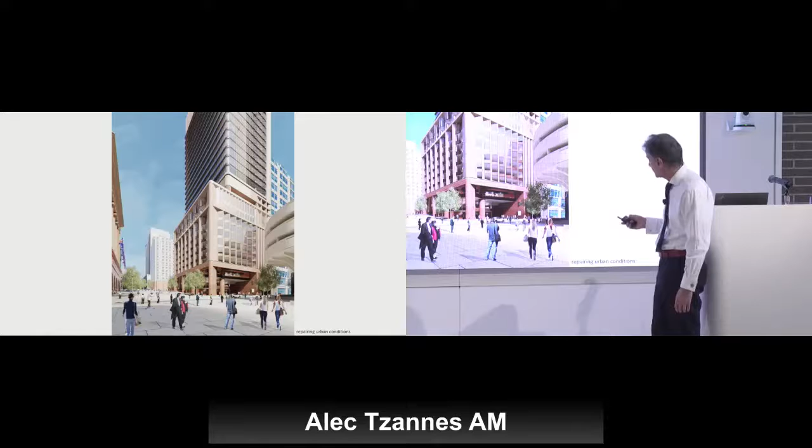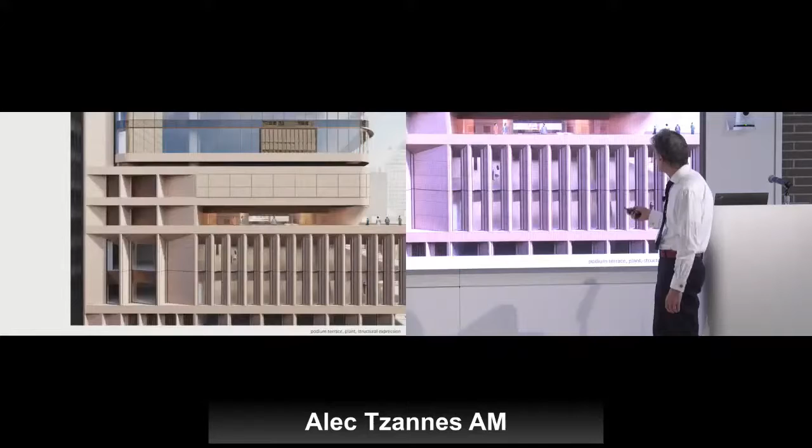a long-term asset. And then you can see up to the commercial heart of Sydney and look up to the idea of the ceramic surround to the observatory or the conservatory type office structure. And here is the level over which you see Martin Place.

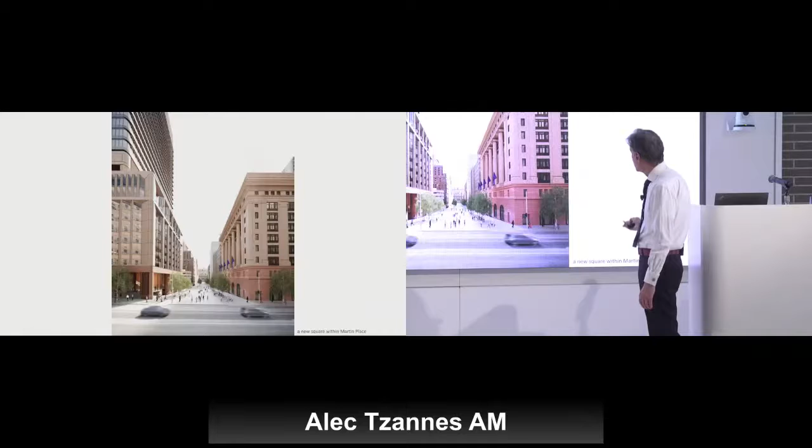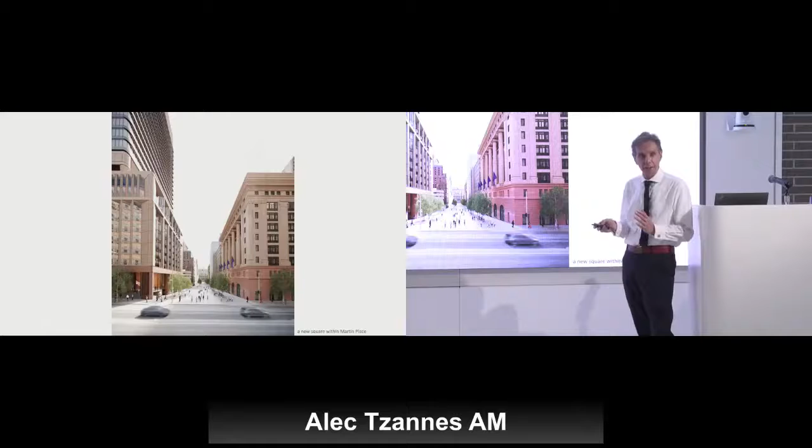Before, we could only identify Martin Place by this building, but now we have this wall and this podium that creates a threshold condition, re-establishing the significance and priority of this street in Sydney. This is the square formed between buildings in conversation about 100 years apart. So this idea is about placemaking, about density, placing density where there's amenity without reducing the amenity of the public domain, reducing urban sprawl, as American academics have clearly argued is a priority for our future. It's both an urban intensification exercise and a placemaking exercise.

I'd like to finish on just one or two slides. This design was probably 4 or 5 years ago. We've had COVID, and the future of the office building is somewhat in doubt. We don't know the financial model. We're not sure, with work from home and work from anywhere, what the office building might become.

So this competition posed a different financial model for the office building, which is that it's not just about leasing space, but about creating a sense of belonging, like belonging to a club. You might be a single parent with a small business who wants to work from home but needs facilities, which you can access through a club membership. This building becomes available to you, with facilities such as meeting spaces, activity-based workspaces, functions for your family, medical centres, gymnasiums, and food. The idea is that the building has an identity and role beyond just being an office building, so you can both be a tenant and have an annual subscription giving you, say, 4 weeks a year, once a week, in this building.

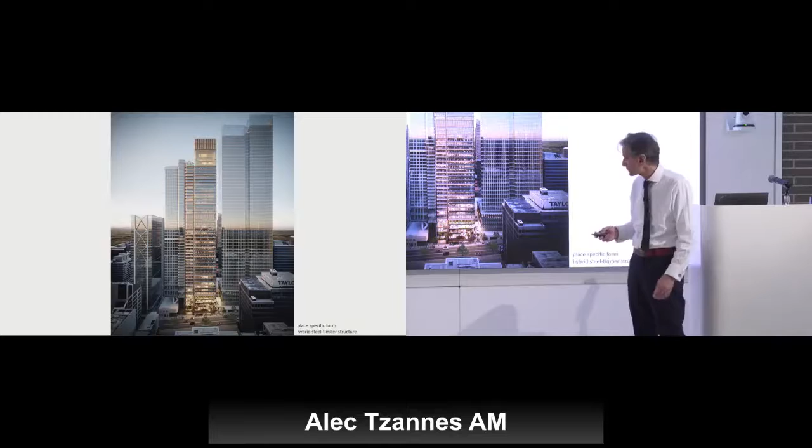That really concludes my presentation to you, and the idea that we are moving to a different world, one perhaps shaped by different values and the advancement of knowledge, and the acceptance of it in policy making for the future. Thank you.